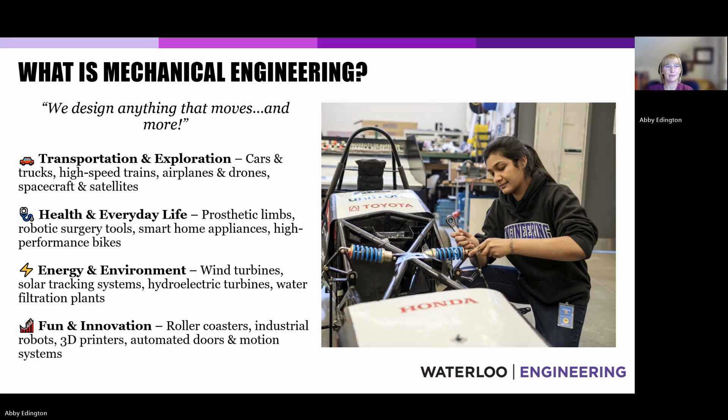Waterloo's Mechanical and Mechatronics Engineering Department is the largest of its kind in Canada, with 63 full-time professors and expertise across a wide range of exciting fields. For example, we have leading research in additive manufacturing, autonomous vehicles, green energy, and assistive technologies like exoskeletons. Our RoboHub is a unique multi-robot facility, one of the only ones in the world to bring together ground, aerial, humanoid, and magnetic levitation platforms under one roof. From advanced robotics to micro-electromechanical machines, the work happening here is pushing the boundaries of what's possible.

The Mechanical and Mechatronics Engineering Department is committed to fostering a positive and supportive environment. One unique feature of the program is its cohort system, where students take courses with the same group of approximately 90 to 120 classmates throughout their entire degree. Cohorts typically remain in the same classroom for lectures during the day, helping to build strong connections and a close-knit academic community. Hands-on learning is embedded throughout the curriculum.

In first year, students participate in the Engineering Ideas Clinic, where they begin developing practical engineering skills through structured design challenges, prototyping exercises, and experimentation. As students progress throughout the program, they gain experience with machining, measurement tools, control systems, and lab-based investigations across areas like thermodynamics, fluid mechanics, materials, and manufacturing processes.

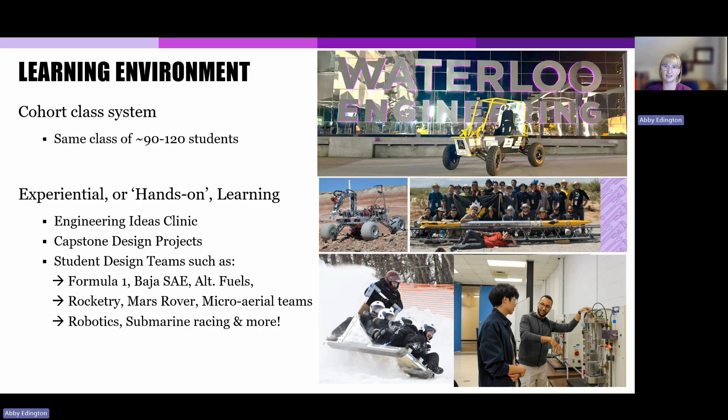This hands-on philosophy extends into the upper years of the program, including ME 380, a third-year mechanical engineering course focused on design and competition. In this course, students apply their technical knowledge to solve open-ended design challenges, often in the form of a friendly competition. Teams might be tasked with designing a structure that can hold the most weight using limited materials, or building a device that can race across an obstacle course.

In fourth year, all engineering students participate in a capstone design project. Working in teams, students identify a real-world problem and design a solution to address that need, applying everything they've learned throughout their degree. This work culminates in the design symposia, where students publicly present and demonstrate their projects to classmates, faculty, and industry partners. Projects span a wide range of industries and challenges.

Past examples include robotic hockey stick testers, drone applications for package delivery, automated greenhouse systems, and assistive technologies for individuals with vision impairments. These projects are an opportunity to showcase not just technical and design skills, but also communication, creativity, and teamwork. For many students, it's one of the most rewarding and memorable experiences of the program.

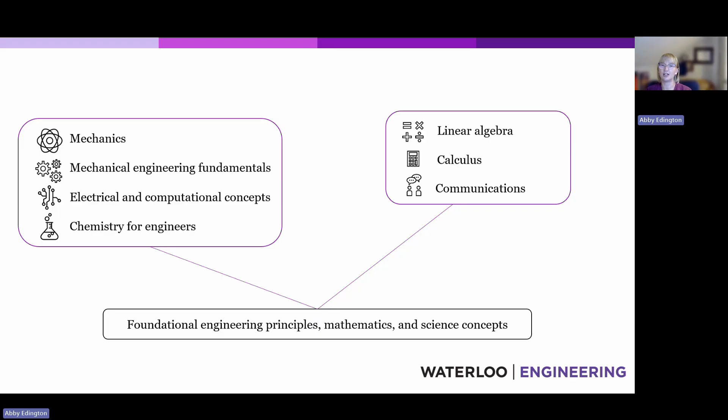Let's walk through the four major subject areas that students explore in mechanical engineering. The first is the foundation of mechanical engineering: mechanics and materials.

Students begin by learning statics and dynamics, how forces act on objects, how structures remain stable, and how motion occurs. They use tools like free body diagrams and equilibrium equations to analyze forces, and apply Newton's laws, energy methods, and momentum principles to predict motion and mechanical behavior.

They then build on this with mechanics of materials, studying how materials respond to different types of stress like tension, shear, and torsion. This includes analyzing beams, columns, and shafts, and understanding failure mechanisms such as fracture, fatigue, and buckling.

This subject area also introduces students to machine design, how to ensure mechanical components are strong enough and safe enough for real-world applications. Understanding mechanics and materials is critical for designing everything from bridges and vehicles to medical devices and robotic arms.

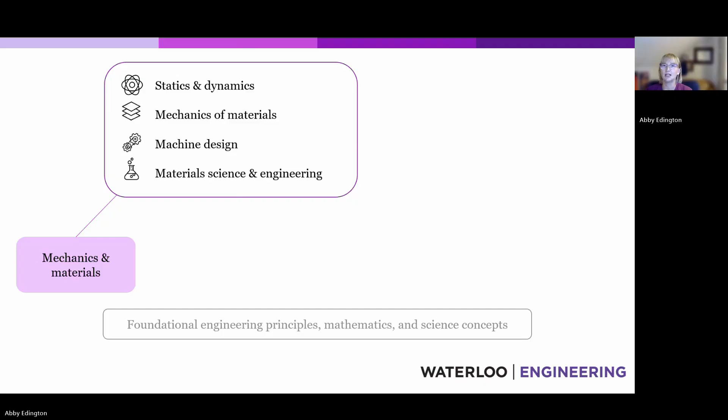The second major subject area in mechanical engineering is thermofluids and energy systems. This area brings together thermodynamics, fluid mechanics, and heat transfer, three core disciplines that help engineers understand how energy moves and transforms in mechanical systems.

Students start with thermodynamics, where they learn the laws of energy conservation and efficiency. These principles are the basis for designing engines, turbines, refrigerators, and power plants. Key concepts include thermodynamic cycles like the Otto, diesel, and Rankine cycles, used in everything from car engines to jet turbines.

Next is fluid mechanics, which explores how liquids and gases behave in motion. Students study concepts like pressure, flow rate, turbulence, and aerodynamic drag. These principles are critical in applications such as aircraft design, water systems, pumps, and compressors.

Heat transfer is the third component, focused on how energy moves through conduction, convection, and radiation. This is important for designing things like radiators, cooling systems, electronics, and building insulation.

Students also explore energy systems and sustainability, looking at how to design more efficient and environmentally responsible power sources. This includes work with solar, wind, geothermal, and hydrogen fuel cells, along with energy storage technologies.

Finally, there's a focus on HVAC systems, used for climate control in buildings, vehicles, and industrial spaces. Students learn how to optimize these systems for energy efficiency and comfort using smart sensors and automation.

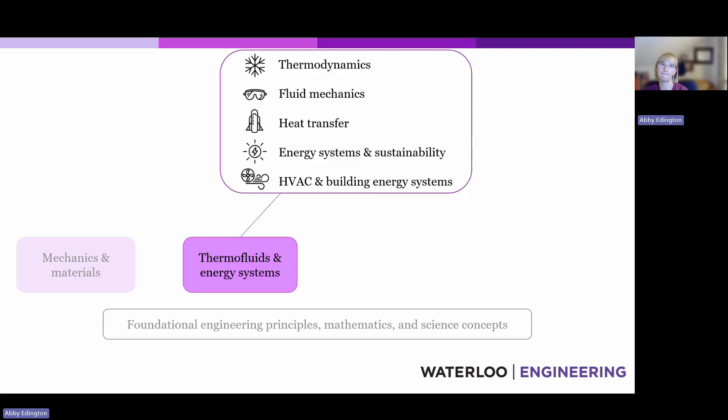The third major subject area in mechanical engineering is manufacturing and production, which focuses on how products are designed, fabricated, and optimized for large-scale production.

Students begin by learning about manufacturing processes, including traditional methods like machining, casting, molding, and joining. These are used in industries like automotive and aerospace to shape and assemble components.

The course material also covers modern techniques like additive manufacturing, or 3D printing, and micro-nano manufacturing for electronics and biomedical devices.

The program also introduces students to automation and robotics in manufacturing. This includes CNC machining, industrial robotics for assembly and welding, and smart factory technologies like digital twins and AI systems that monitor production in real time.

Another key area is quality control and manufacturing optimization. Students explore concepts like statistical process control, lean manufacturing, and Six Sigma, all aimed at improving consistency, efficiency, and reducing waste in production.

Finally, there's a growing emphasis on sustainable manufacturing. This includes selecting eco-friendly materials, designing energy-efficient processes, and evaluating environmental impact through life cycle assessments.

Understanding these systems is essential for turning engineering designs into real-world products efficiently, affordably, and sustainably across industries from healthcare to consumer tech to transportation.

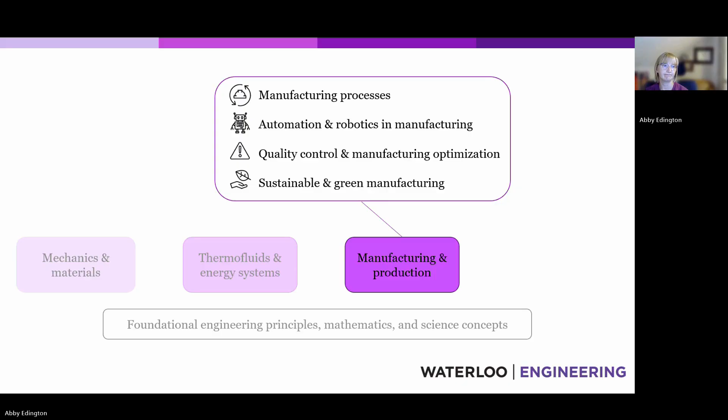The final core subject area is control and mechatronics. This field combines mechanical, electrical, and software engineering to create smart, automated systems, like robotic arms, self-driving cars, and intelligent manufacturing equipment.

Students start by learning about control systems, which allow machines to monitor their performance and make real-time adjustments. This includes everything from cruise control in cars to temperature regulation in industrial furnaces.

They study control strategies like open loop and feedback control, including techniques like PID control, which helps stabilize systems like drones or robotic platforms. Next, students explore how machines interact with the physical world through sensors, actuators, and embedded systems.

Sensors collect data like position, speed, or temperature, while actuators perform motion or force-based actions. Embedded systems process this information in real time to keep systems running smoothly.

The program also covers robotics and autonomous systems, where students learn how to build and program intelligent machines, from robotic surgical tools to warehouse robots and autonomous vehicles. Topics include motion planning, computer vision, and even swarm robotics.

In smart manufacturing, students see how control and mechatronics drive Industry 4.0, using automation, connected sensors, and digital models to make factories more efficient and responsive.

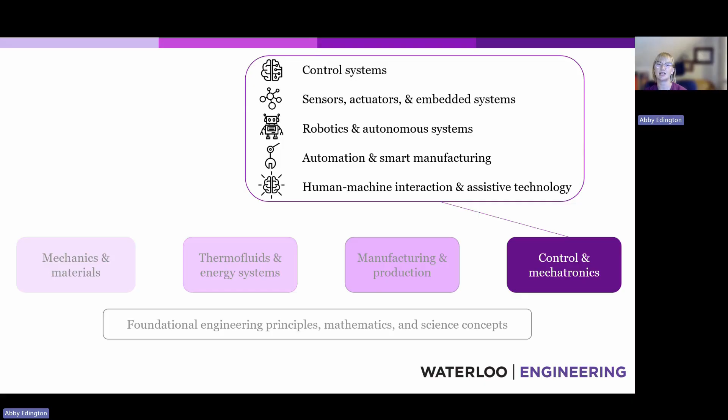In the upper years of mechanical engineering, students explore advanced topics that integrate mechanics, materials, control systems, thermodynamics, and manufacturing. These areas reflect real-world innovation and emerging technologies.

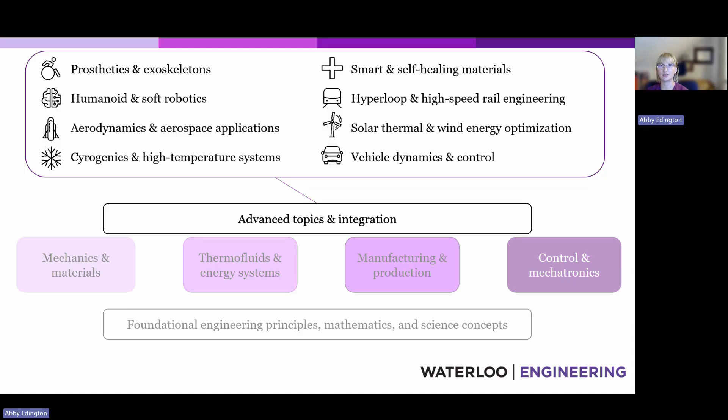Examples include prosthetics and exoskeletons for mobility and rehabilitation, soft and humanoid robotics for human interaction, aerodynamics for aerospace and automotive performance, extreme temperature systems including cryogenics and fusion, smart and self-healing materials for safety and longevity, hyperloop and high-speed rail design, renewable energy systems like solar thermal and wind optimization, and vehicle dynamics and control for electric and autonomous vehicles. These topics allow students to apply their skills to cutting-edge problems in health, transportation, energy, and beyond.

In addition to your core degree requirements, you may choose to add a specialization or an option to focus on a specific area of interest. Specializations are program specific and typically involve completing 4 to 6 designated courses. In mechanical engineering, one specialization is available, welding and joining, which can be added in the upper years of the program.

Options are available across all engineering programs and usually require 5 to 8 courses. Popular choices among mechanical engineering students include biomechanics, artificial intelligence, and mechatronics, though there are a total of 13 options to choose from. These additions allow students to tailor their degree towards specific industries or emerging technologies of interest.

At Waterloo, mechanical engineering students gain valuable real-world experience through North America's largest co-op program. Students complete 6 paid work terms as part of their degree, applying classroom knowledge in professional environments and building meaningful industry connections. Co-op positions span a wide range of industries and roles, from product design and manufacturing to robotics, automotive systems, aerospace, and energy. This variety allows students to explore different career paths and develop both technical and professional skills.

And it's a system that works. 96% of our co-op graduates find employment related to their skills within 6 months of graduation, compared to just 83% for Ontario University grads overall. These experiences often lead to full-time job offers and give students a strong head start in launching their careers.

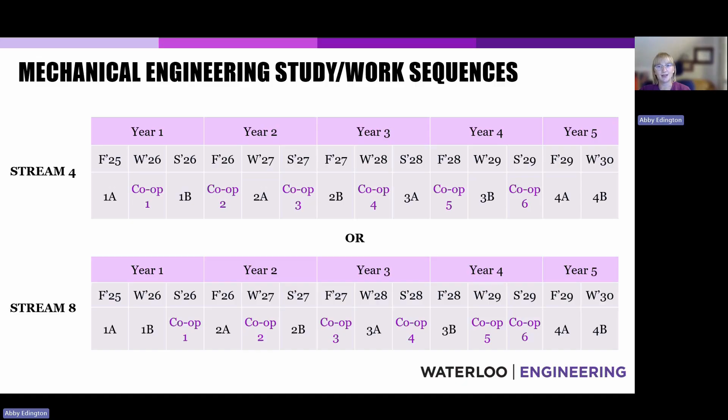This structure is what makes Waterloo's co-op program unique. It provides a balance between academic learning and practical industry experience. Whether students are in Stream 4 or Stream 8, both pathways lead to a strong foundation for future careers.

A degree in mechanical engineering opens doors to a wide range of career opportunities across many sectors. Because of its broad foundation in mechanics, materials, energy systems, and automation, mechanical engineering is one of the most versatile engineering disciplines.

Graduates find roles in manufacturing, energy and sustainability, transportation and mobility, aerospace, healthcare, and biomedical engineering, robotics, and advanced automation. Some work in design and product development, while others move into project management, consulting, or technical sales.

The flexibility of this degree allows graduates to follow a path that aligns both with their interests and with evolving industry needs. Many graduates also choose to pursue further education, such as a Master of Engineering, a Master of Applied Science, or a PhD. Whether entering the workforce directly or continuing with graduate studies, mechanical engineering graduates leave the program well prepared to make meaningful contributions across a wide range of fields.